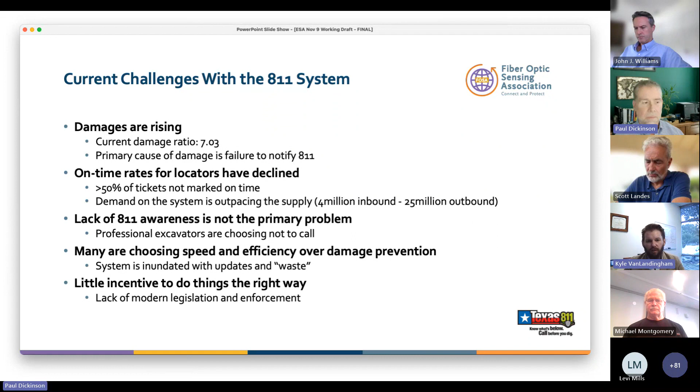Obviously, it causes huge issues for excavators, especially when they've got rental equipment on site, they've got staff on site, and they're sitting there waiting multiple days to get started. So that's kind of been the catalyst for some changes in behavior that we're seeing on that side.

But really, overall, we're just seeing that the demand on the system is outpacing the supply. There's just not enough locators out there to handle the ever-increasing volume of one-call tickets. Right now in Texas, we're looking at about 4 million inbound notices to excavate this year, which is going to equate to about 25 million outbound to our member facility operators.

So really what we're seeing now, which I never thought that I would see, is the lack of awareness around the 811 system is not the primary problem anymore for not calling 811.

We're seeing this a lot now from professional excavators that are choosing not to call, for a variety of reasons. But really, what we've talked to some of these excavators about is that they have lost a little bit of faith in the system over the last handful of years. They don't believe that when they process a ticket, 2 days later those lines are going to be marked and ready for them to go. So we're seeing some really big changes on that side of things.

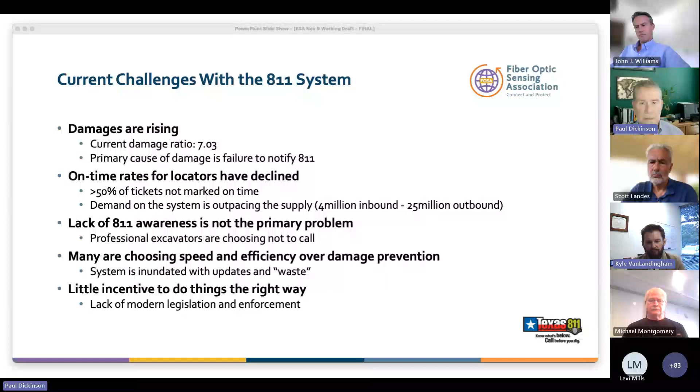And then lastly, there's little incentive to do things the right way. I know here in Texas, we are in a pretty major need of some more modern legislation, and we don't really have hardly any enforcement here. So when there's no consequences for actions, there's little incentive to start doing things the right way, and we're really starting to see that now.

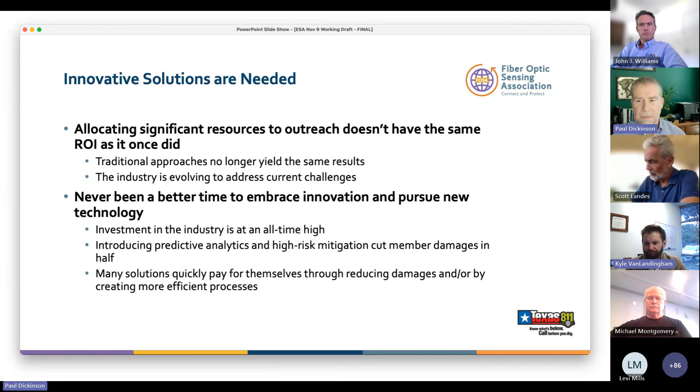Thanks, Kyle. So now you know why we're here. And I know I'm preaching to the choir big time here, so please, if I'm insulting in any way, forgive me. But you all know about damage, you know about excavation, you know about the infrastructure that gets impacted, just as Kyle described. We are here to introduce a technology where we would love to, as a takeaway, collaborate intensely with any one or many of you who would like to work with us on how this could work within your utility, within your business, within your support organization.

So I come to you from the Fiber Optic Sensing Association. Time is tight, so I'm going to go quickly through the slides, but we're a nonprofit founded back in 2017 that deals with the technology I'm going to describe to you, which has not been used primarily in utilities. It's not been used in your industry at all. It's been used primarily for monitoring long pipelines, transmission pipelines. It's been used for border security. It's been used for other applications. It's been around for decades, and it's very well proven.

What's happening now, and the reason why we're here now, is it's emerging into areas that can benefit you. So it's emerging along roads, it's emerging along gas and electric pipelines, water pipelines, and that's the relevance of what we're going to talk about today.

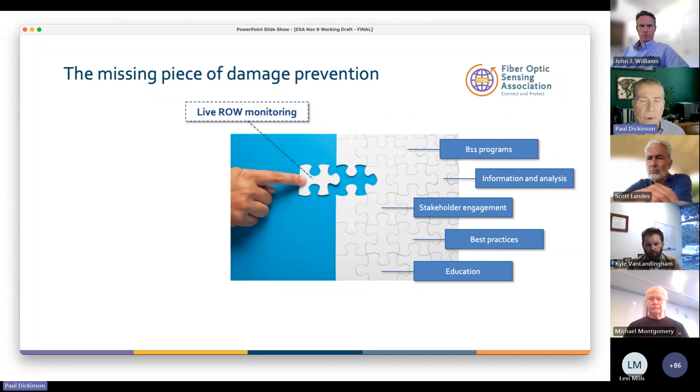I'm being a little redundant here, but I think it's good to reiterate that we have the 811 programs. They do a fantastic job. Scott's organization, also the Common Ground Alliance, a lot of organizations are focusing on how do we stop these damages as we continue to build out our infrastructure from happening, or certainly lower them tremendously. We do this through all the practices here, but there is a missing piece, and the missing piece is live right-of-way monitoring. The technologies that address this currently are through a ticketing or a protocol process primarily. They're not through how do I stop the damage from occurring before it happens.

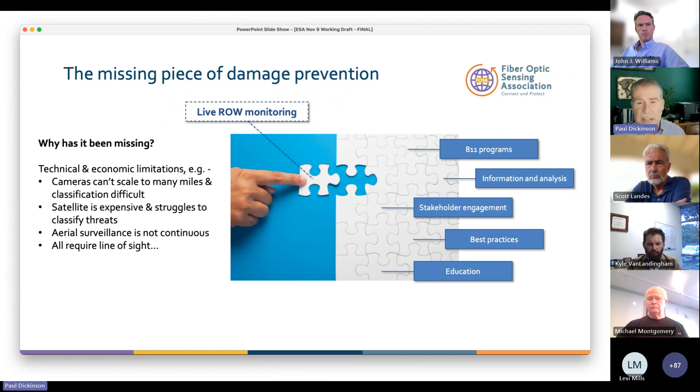And Kyle also just described, you can't have a camera everywhere. You can't afford to have a drone and aerial surveillance and satellite imagery and such that's real time. It's line of sight, and it's very expensive, and it's not 24/7, so there's a lot of labor and manpower associated with it.

What we do know, independent of infrastructure and utilities and our underground assets that aren't telecom, is that there's fiber that's ubiquitous throughout the entire world right now. It's reducing the digital divide. There's tons of government funding out there that's going to continue to build fiber in our nation's cities, along our roads, along our utilities. It's already there now, and there's more coming.

Having fiber that's already there for your SCADA network or for broadband, that happens to be close or right in the same right-of-way as your utility, can be used as a sensor. It can be used to monitor and eliminate damages, and it can also be used to monitor operational benefits. So where no fiber exists, as you build out in the future, putting fiber in will add to this value.

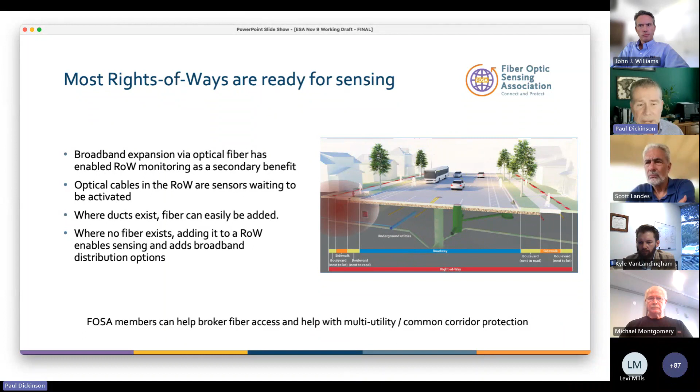Let me describe how this works. I don't want to get super technical here — we don't have time, and there's frankly not even a reason to go down that road. Fiber is used right now with laser pulses to provide our internet, the broadband. You send laser down one end, and you have information that comes out the other. This is why we have a capillary system of fiber throughout the world. But the same fiber that's used for telecom right now can be used for an entirely different purpose.

That purpose is to turn the fiber along its length into a distributed sensor. That distributed sensor is extremely sensitive and can actually detect if someone is adjacent to the right-of-way, opening a manhole or tapping with a shovel or digging up the ground with an excavator. As Kyle and others have talked about with the fiber optic sensing organization very extensively, sometimes there's an 811 ticket for doing that, and sometimes there's not.

What this technology does is enable you to identify within a very short distance along the route of the fiber — we're talking 5, 10, 20, 30 feet — that something is going on, and it can actually, through the software, identify what it is that's going on. That's tremendously powerful, and it's monitoring for vibrations.

There's also the capability, probably not quite as relevant to you guys for damages, to monitor for temperature and strain. You're going to see some wonderful, colorful charts in a few minutes as we go through them very quickly. What it does is it pulls up an alert on a map, and that alert will show you something's happening, and it's able to send out an automated text or an email or response to get people to respond. So that's the gist of the technology.

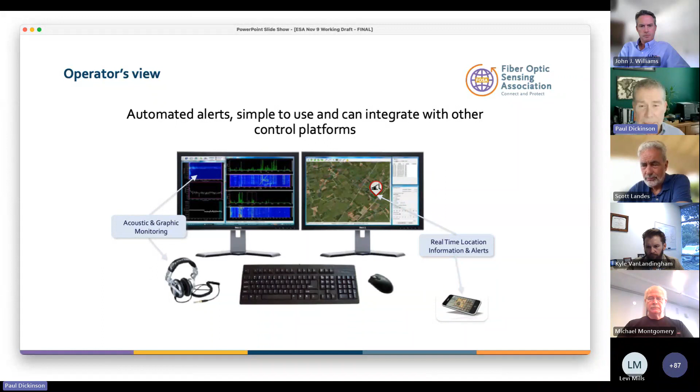It goes into a command center. While you may get wonderful analysis that gets into quite detail, like on the left side of this chart, what's really important for a utility, a telecom, or anyone else interested in monitoring their assets is knowing something's happening at this location on my GIS map — and I either know about it and I'm okay with it, or I'm not okay with it and I've got to do something about it quickly, or I'm going to have a problem. With that, I'm going to pass on, and we're going to click through some really nice demonstrations that give you an idea.

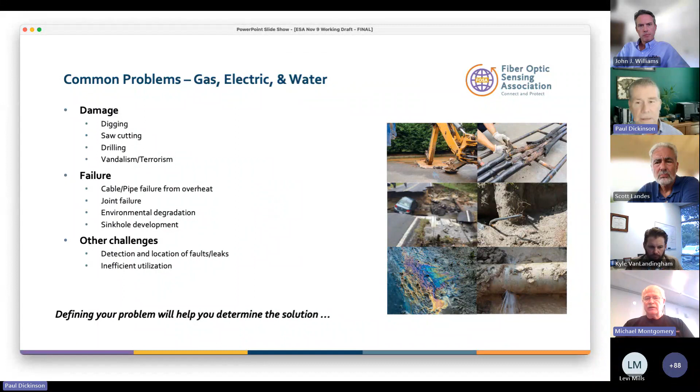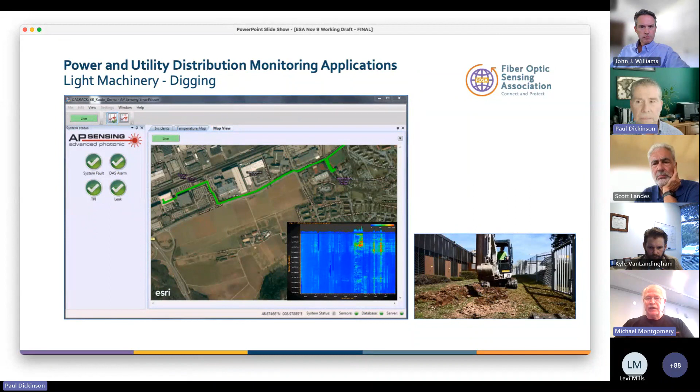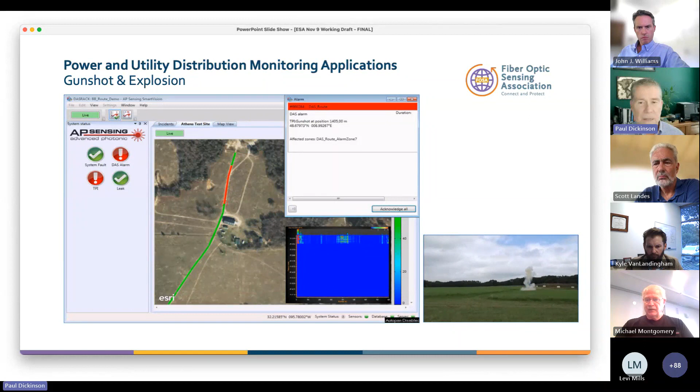The same kind of detection can be triggered by other events. This is an example of detection of gunshot activity. A surface gunshot movement can cause an acoustic burst that the system can detect. Things like explosions can very readily be detected by this kind of acoustic monitoring technology. We'll wait just a moment for the explosion to occur and then switch to the next slide. There's the explosion and the much broader element of the acoustic disturbance that you could see.

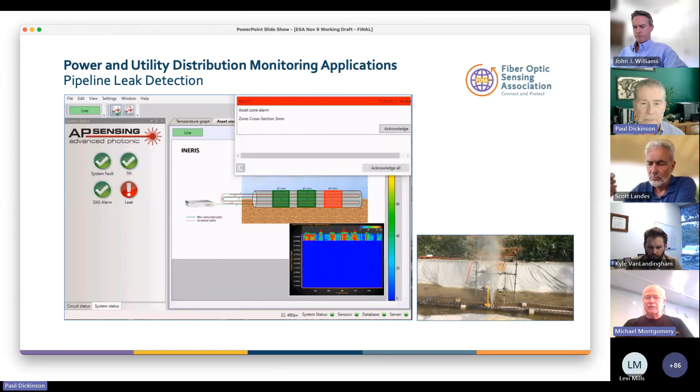This is an illustration of a pipeline leak detection. For example, if a utility is operating a high pressure fluid filled electric conductor under the ground and that pipe develops a leak, the acoustic monitoring or temperature monitoring technology can detect that kind of activity and generate a report showing the exact location.

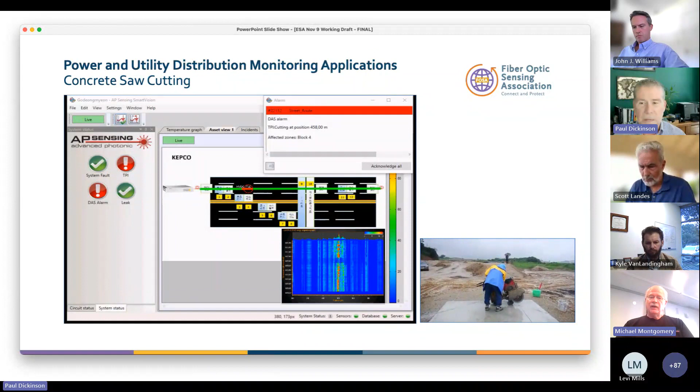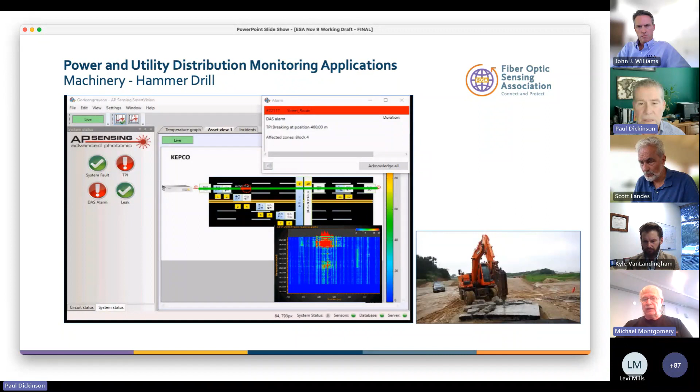As you can see from these examples, the systems not only detect the acoustic energy and plot its exact location on a geospatial map, but they can even identify what particular disturbance is being classified. It can tell the difference between a jackhammer digging in the street, an excavator digging in the ground, or a saw cutting through a concrete pad. These are all readily recognizable and reportable disturbances that can be accurately located along a utility path.

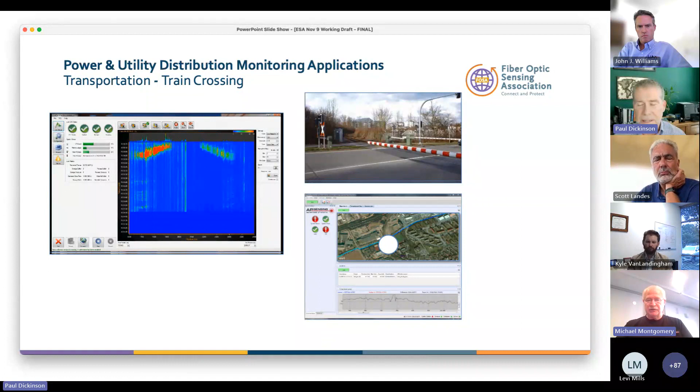After those technology demonstrations, we can see that this kind of technology can very readily detect intrusion attempts, but distributed fiber optic sensing can also monitor and report on operational issues that potentially can lead to damage, such as the overall distributed temperature of an underground power cable, temperatures of joints and hot spots, and other events that relate to the operational condition of underground utilities, including power, water, sewer, and many other kinds of utility operations.

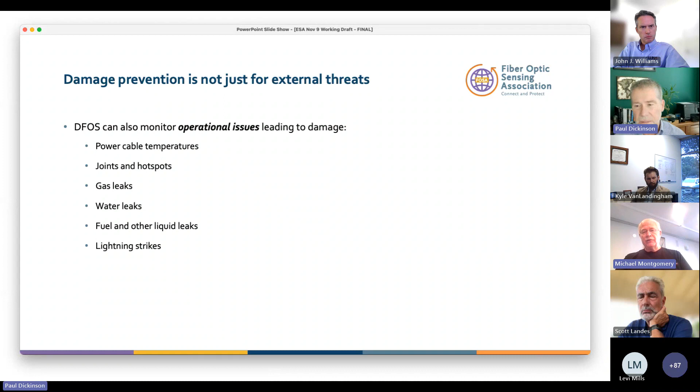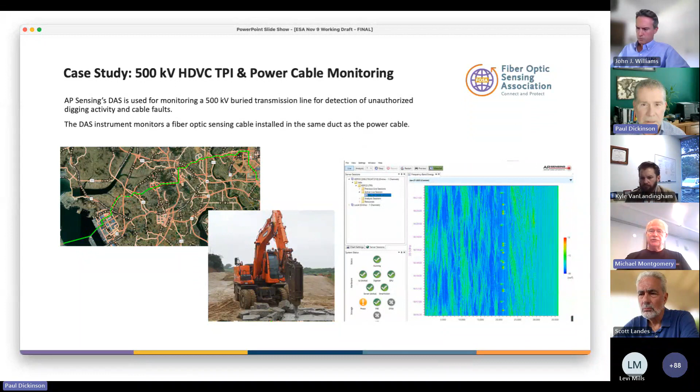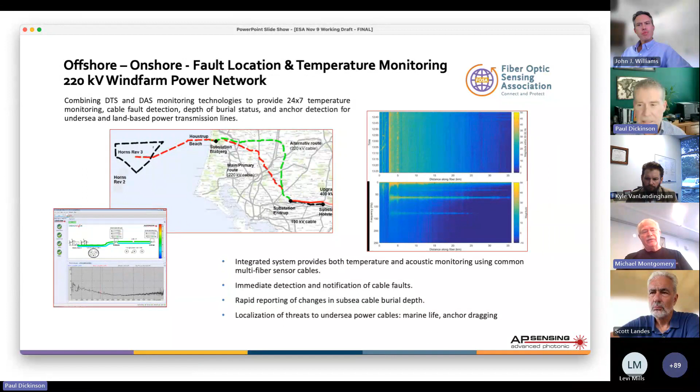Similarly, a combination of acoustic and temperature monitoring technology can provide multi-purpose monitoring. In this example, a combination of an acoustic monitoring system and a temperature monitoring system is providing monitoring capability for this undersea cable from an offshore wind farm to detect the presence of things like ship and anchor traffic, while still providing 24/7 temperature monitoring capability, showing the conductor's ampacity and things that can affect the ability to conduct current.

Thanks, Michael. Appreciate it. Before we go on, I want to make a comment here because we're showing you a lot of stuff quickly, but we just want to give you a flavor of what the technology can do. The important point I perhaps didn't make earlier is this is a passive detection system. In other words, you have fiber cable under the ground that's maybe going on for 25 or 30 miles in one direction. The only electrical unit that's providing the laser pulses sits safely in a little rack of equipment somewhere 25, 30, 40 miles away.

So we're talking about a very long capability of monitoring an asset without putting things in the field that don't have to be adjusted or monitored or calibrated over time. So I just want you to get that idea in your mind as I pass it over to JJ Williams to show you a few more examples, and then we're going to tie it all together and get ready for questions.

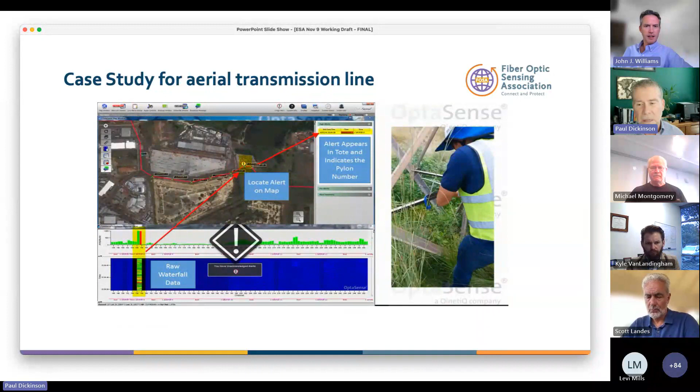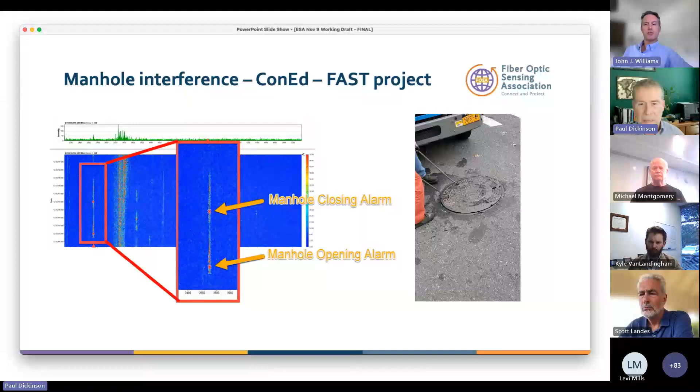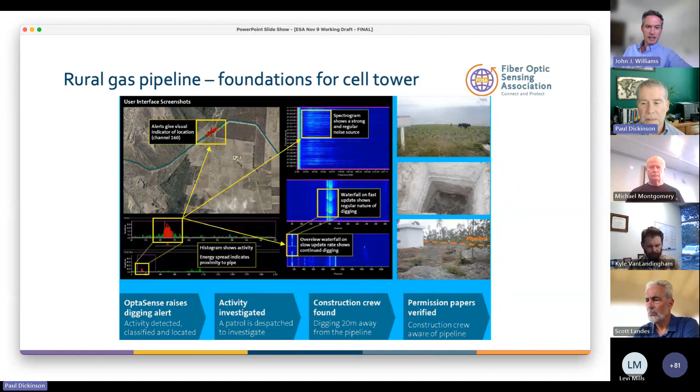This is an example in a rural setting where the locators out surveying made a mistake, and instead of measuring away from a large diameter pipeline, they measured towards it - human error. We were picking up digging alarms over an extended period of time, and the operator went out and investigated and found they were digging the foundations for a cell tower, for a wireless tower. So that was quite a scary event. And even though they were permitted, they messed up on the locate.

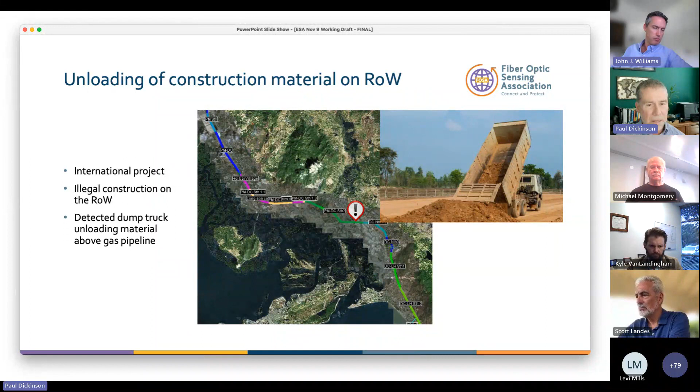And another example, this is unpermitted construction. They were building houses that were completely unpermitted in a remote area outside a city. We were picking up them dumping huge amounts of soil, getting ready for a major construction effort that was completely illegal. So that's another example.

So all these systems are very, very configurable to what kind of fiber you have out there, whether installed in conduit or in a duct bank. It could be 20 years old. I talked about that 100,000 miles of installations we have around the world - I'd say about 80% of that has been on 10, 20, 30-year-old fiber. And when you set these systems up, you need to configure them to detect what is a threat to a buried or aerial asset, and then ignore other noises in the environment that are just the daily pattern of life in a city, for example.

So we do these things called site acceptance tests, where we configure the system to what the operator wants. This is up in the Northeast - I think this was actually in Toronto, where for every installation we do site acceptance tests saying, is the system alarming in the way that the operator or asset owner wants, in terms of what is a threat, and is that coming into their control room or call center in the correct way? So we do these tests, and we do ongoing support - as a vendor, all vendors provide ongoing support for operators who have these systems deployed.

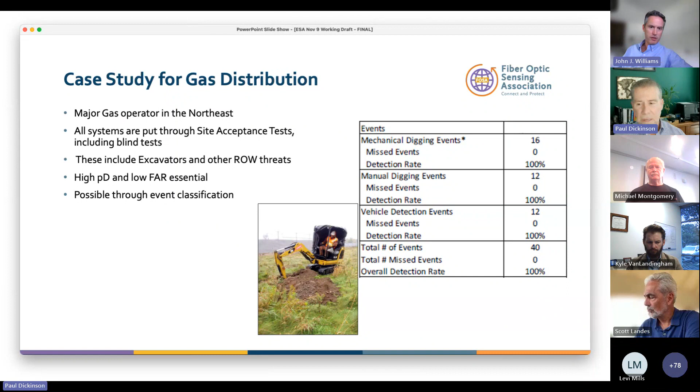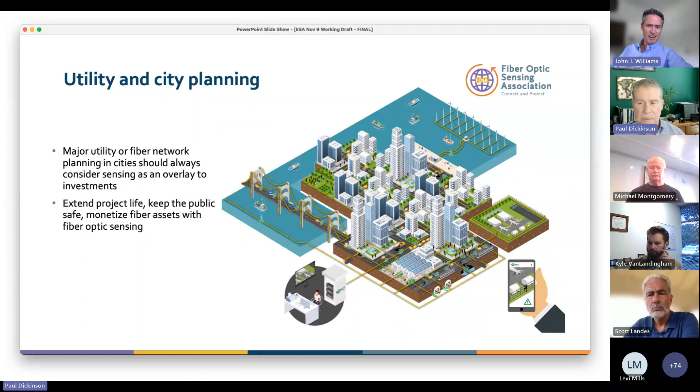Okay, so this is just another example. So, when you're planning utility or other investments, fiber rollout, broadband rollout, consider this technology. Consider how it can be used to monitor for both the damage prevention and the operational benefits that Michael described. With this little bit of pre-planning, it's not a huge delta on the investment, but you can get all of these benefits that make these assets safer for the public, longer lasting, and so forth.

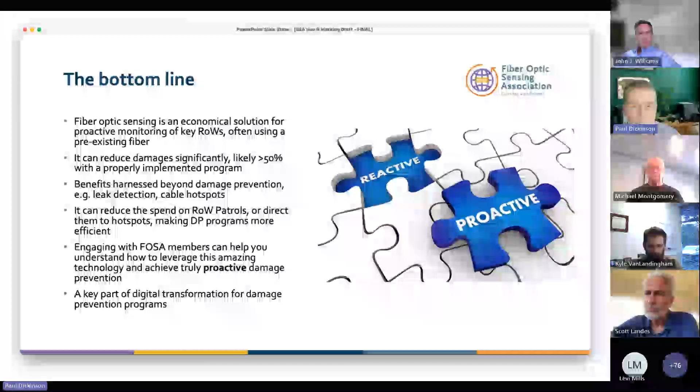It can reduce your damages significantly, especially if you're providing them on critical routes where you typically have a lot of damage. As JJ mentioned, operationally, it provides so many other value-added ways to monitor your assets in productive ways, so you could do proactive maintenance in addition to just stopping damage from happening. It's really a key enabler that a lot of people are just now coming into awareness of, and it can be coupled with an 811 program, as Kyle mentioned.

So just a summary here, and then I'm going to show you our contact information. Then I want to get into Q&A.

Damages are clear—that's one of the reasons why this organization exists. It's a well-documented problem. They're not going away anytime in the future. In fact, they're going to get worse because we're building out more infrastructure with not so great as-built records underground, where you're not sure whether live assets or assets that are no longer live exist. You're going to continue to have problems, you're going to continue to have life safety events. I don't need to tell you that—that's what this organization does.

But with this technology, you have the ability for the first time for proactive right-of-way monitoring. If it's done in an intelligent way, at the lowest level, it can impact you directly as a utility, and you can benefit from that. But if it's done in a collaborative way, it could actually benefit an entire right-of-way with multiple utilities, so there's cost sharing. It's easy to deploy.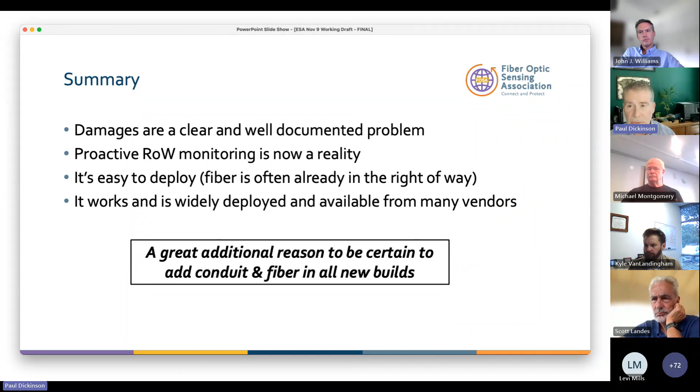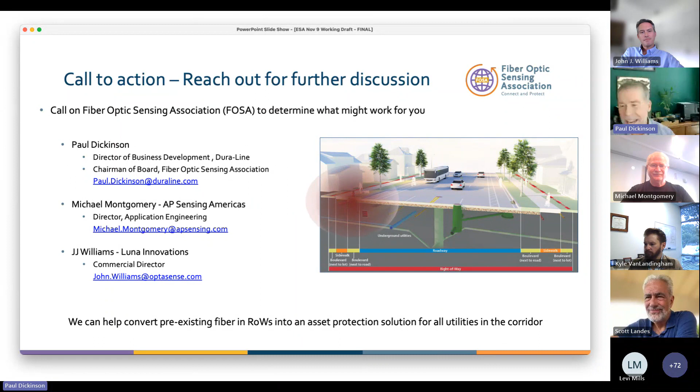Yeah, Paul, great, thanks, that was very informative. Even though I've seen it once before, not at this lightning speed, it was still helpful to get a grip on it. A couple of questions that are out there are, how does it locate different utilities, and does it give an XYZ position?

I can address that if you like, as a first, and then JJ might have some additional, because we both kind of do the same thing in slightly different ways.

The second part first: the mapping of a fiber optic based system throughout a network path is integrated through geospatial positioning. So the graphic display, for example the map of an underground power cable, is mapped with GPS coordinates. The systems are able to very accurately measure and locate the linear distance from a controlled device to the point of a disturbance, and that's plugged into the geospatial integration so it can show up with specific latitude and longitude coordinates on a geospatial map.

That can be done very accurately, so that the Utility Operations Center, when a disturbance comes in, almost instantly gets a display of virtually the street address of the location of the disturbance. It can be very fast and very accurate.

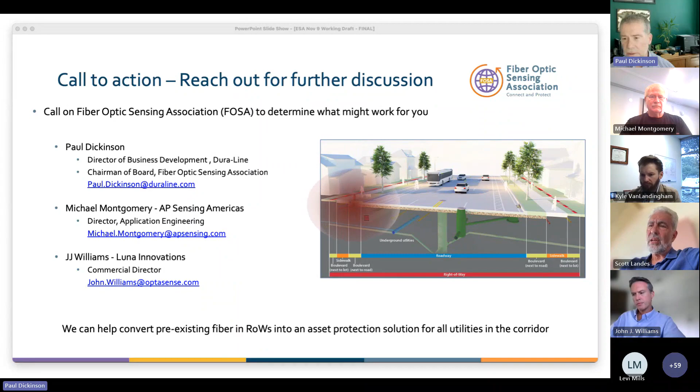I don't want to cut into your final few minutes, Scott, but if you see another burning question out there, let us know. There's probably one here about the average cost of repair. I think the concern is if they put this next to a gas line and something gets hit, what would it cost to repair the two things?

Well, the whole point is it doesn't happen. The whole point is damage prevention. We should be providing very early warning when somebody comes onto the right of way with construction machinery, alarming on that rather than after somebody's hit your pipe or broken your cable, because by then it's too late. Early warning is the key, and it's all about damage prevention. And if there is damage to the fiber, we will detect it and locate it very accurately.

For fiber restoration, it really is just splice. There are many splicing engineers, telecom engineers, who can be there at short notice and splice a cable within a few hours. That would be actually helpful, because if your fiber's hit and your gas line's hit, this at least tells you exactly where your gas line is probably hit as well, or very close.

Something else I wanted to add, just looking at our mapping system and seeing how congested a lot of these right-of-ways are with all different types of utilities owned by different operators. One of the great things about this is if there's fiber actively running through there sensing excavation activity, you're not only protecting one facility, you're protecting everything within that right-of-way. So if you do have an unauthorized excavation where maybe an excavator doesn't have a one-call ticket, and you go out there to protect your line, you're also protecting everybody else's facilities that are along that right-of-way.